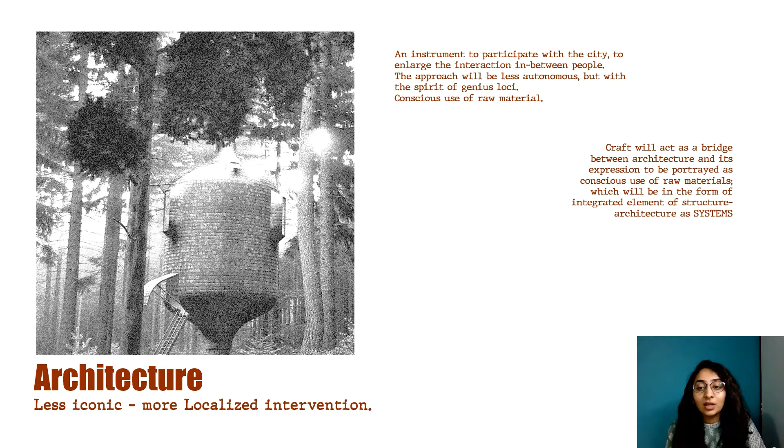And therefore, the architecture is going to be less iconic and with more localized intervention, where there will be a lot of participation from people, and this will lead to a less autonomous approach. This will include craft, and that is where craft will act as a bridge between architecture and its expression, which will be in the form of integrated elements of structures and architecture as systems.

So the systems are going to be skeleton and something which is very open, which will reduce the layered use of raw materials, and that is why craft plus future is going to be all about systems for what, how, where, and for whom. There will be a sense of material, junction, detail, and all of those techniques juxtaposed together, assembled together to form the making, and this will become the integrated element of design, which will try to explore newer possibilities in design.

And this is where Karigarshala 2.0 comes into picture, where it not only provides a platform to come and learn various possibilities of built environment through the integration of craft and its making, but it will also act as a catalyst to generate innovative solutions for the built environment and its interior in the post-Anthropocene era.

And therefore, craft in future will be through the systems of making, which will be a part of the structural system through the integration of materials like bamboo, timber, weaving, and also the debris available will also be reused for the built environment and the integration of craft. This craft will be generative, which can be multiplied to showcase the fusions of scales.

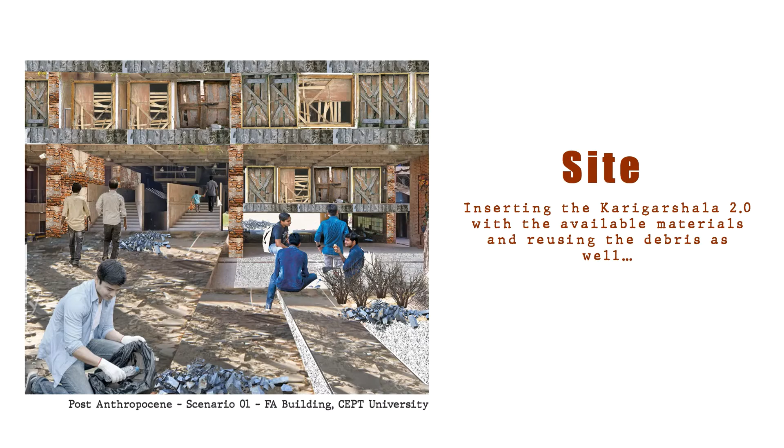The site chosen for Karigarshala 2.0 is the FA building of CEPT University. Here the visualization showcases the post-Anthropocene scenario, where the ruins or the remains are imagined with broken walls and destructed slabs, where the Karigarshala will sit as an insert to perform various activities of workshops and many other such functions.

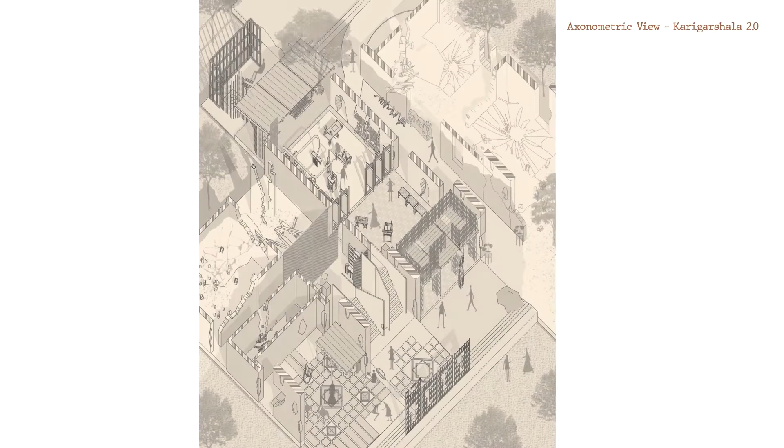Located amongst the stretch of the North Lawns and the double height space, Karigarshala is inserted as a temporary structure free from making a permanent intervention. There is an attempt to utilize the spillover spaces on the soft and the hard landscape for the outdoor activities.

The bamboo and cane weaving area marks as the entrance to the Karigarshala, which is then followed by a formal wood workshop, which is further connected to the administrative mezzanine area with a briefing area. This briefing area marks as a secondary entrance to the Karigarshala.

There is an informal outdoor workshop area which is connected through a display area, which further opens up into the informal gathering space. The informal gathering space also works as a one-day workshop area, which is connected to the formal wood workshop area through the store and packaging room.

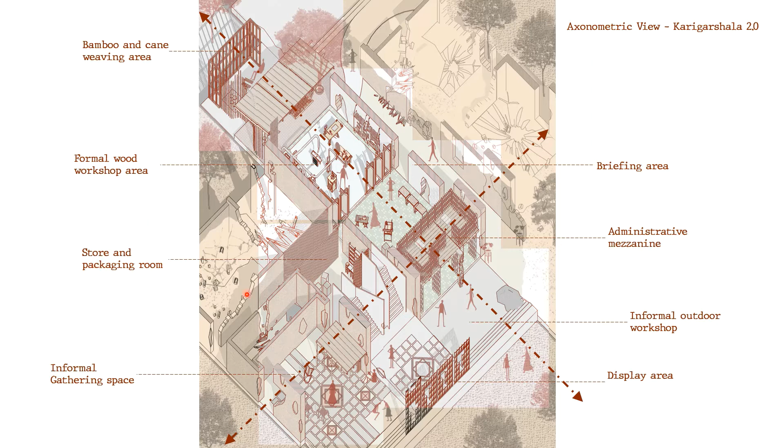Various elements of crafts has been incorporated in the design. For example, in the entrance area, the flooring has been done with ceramic tiles, which is further covered with the semi-open bamboo pavilion for bamboo and cane workers.

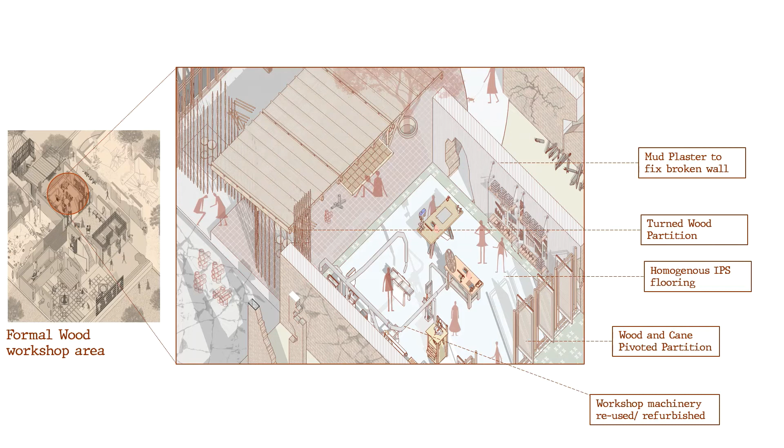Further, in the formal wood workshop area, craft elements like turned wood partition, homogeneous IPS flooring, wood and cane pivoted partitions has been implemented. Further, the tool set area has been done using the wooden planks that has been obtained from the waste doors.

The briefing area has been covered with stone and ceramic inlay, which further transits to the other space called administrative mezzanine area. This mezzanine area has been given structural support from the modules of turned wood. These turned wood modules also act as the partition for the mezzanine area.

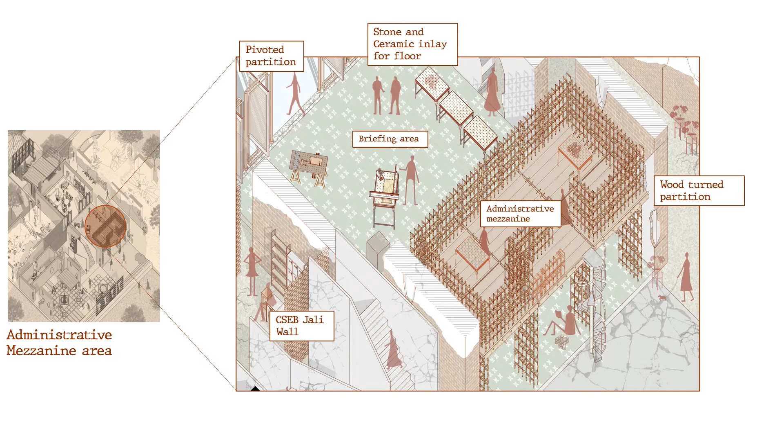The wood turned partition system frequently animates the space through the shadows throughout the day. One engages with craft not only through hands-on making but also at visual level through its presence in the Jali's partition, display system and functional aspects.

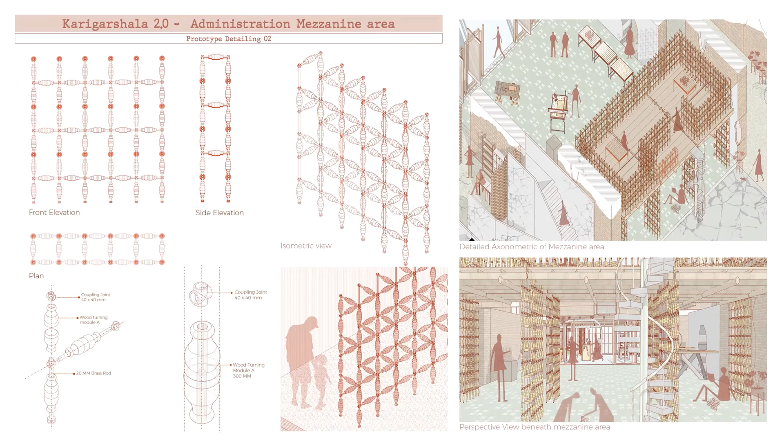Here, the prototype of turned wood has been used, which is of 300 by 300 mm, which has been given the supports from the metal rods, and the connectors as coupling joints from metal has been used.

The display area and gathering space have different types of crafts integrated in it. The first is the bamboo pavilion, second reusing the stone inlay for the floor, third is the modular seating that can be erected from the waste metal, and the last is the brass and cane partition.

This is a modular partition in which different number of modules can be added and subtracted to have different size and form. Each module consists of brass metal sheet along with cane weaving. This has been erected in a metal frame.

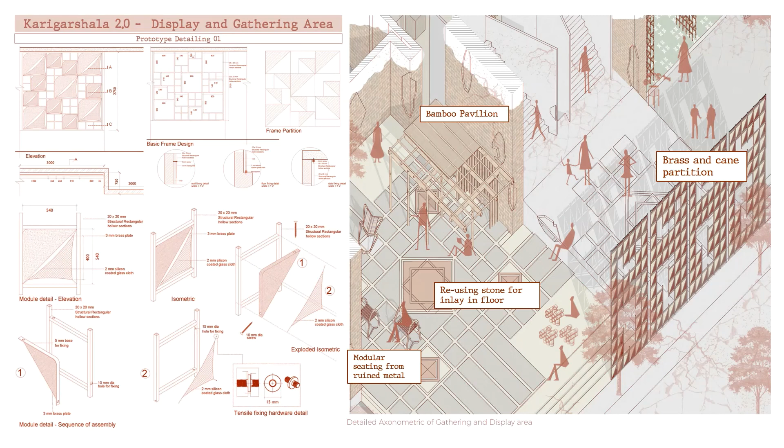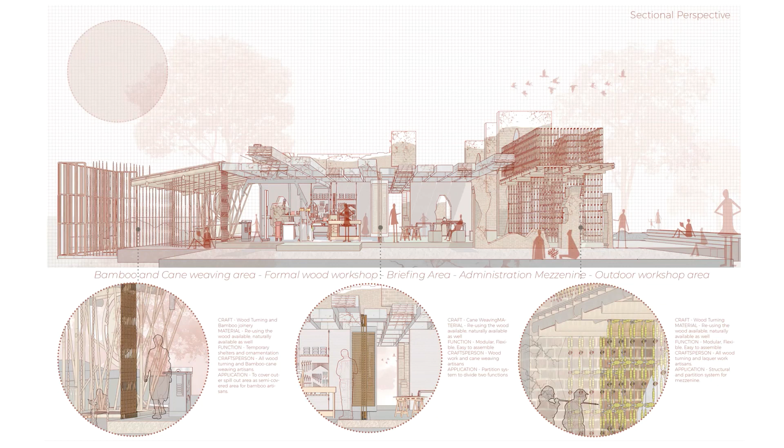Hence, Karigarshala portrays itself as a collage of multiple craft elements that come together to form a system as a whole and individual unit as a system, which also showcases its temporary and flexible characteristic supported through craft, its maker and the making techniques.